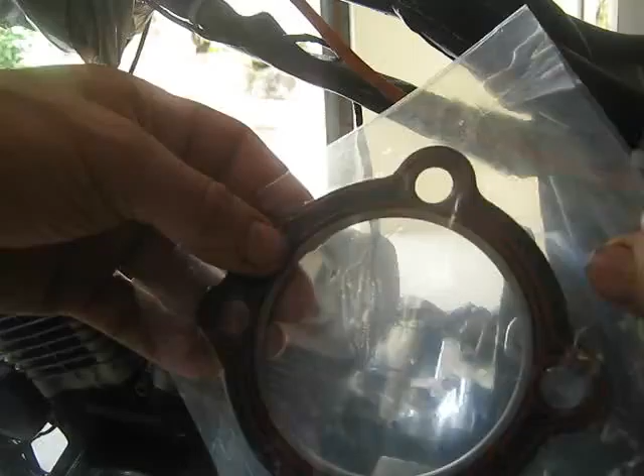Okay, this is the gasket set I'm using. Street Sport Industries.

I think it said silicon, and it was very economical. I could have spent a couple hundred dollars, but it's $45.99 in the US. It costs $64.90 here, plus $18.49 for postage. So that's what I'm dealing with getting parts here. It's a good deal more expensive - the Australian dollar is close to 60 cents to the US dollar.

Try and get some more information.

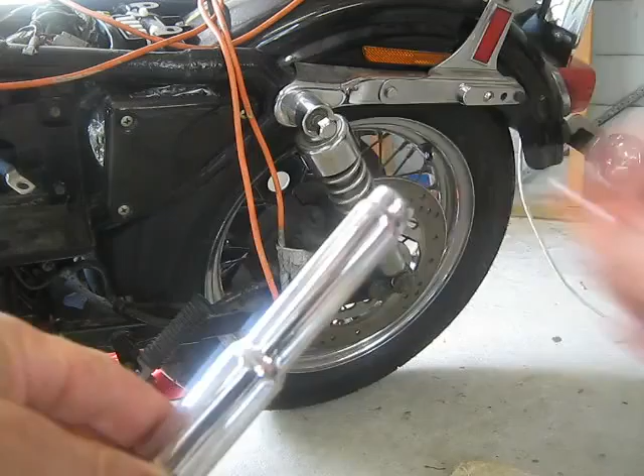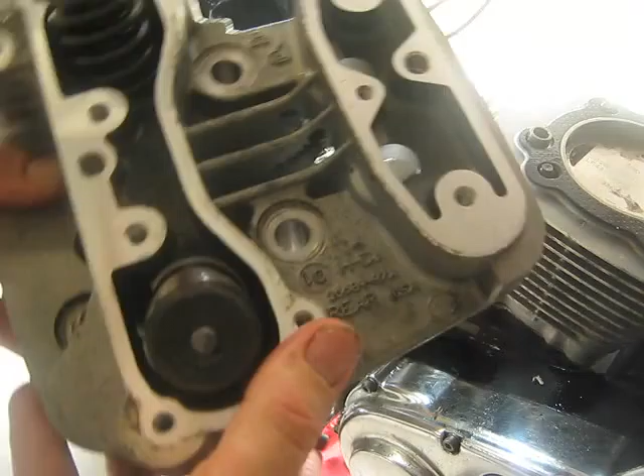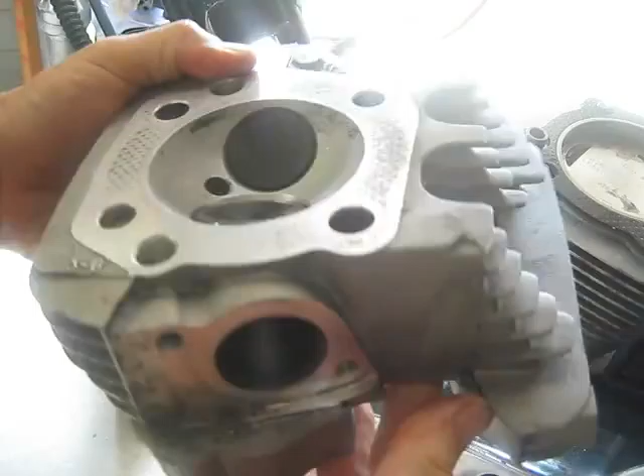Okay, rear cylinder head, 16684 87A. 16684 87A. That's the inlet, exhaust.

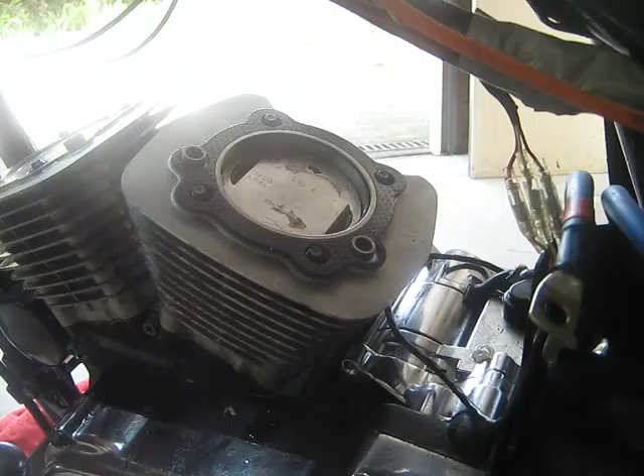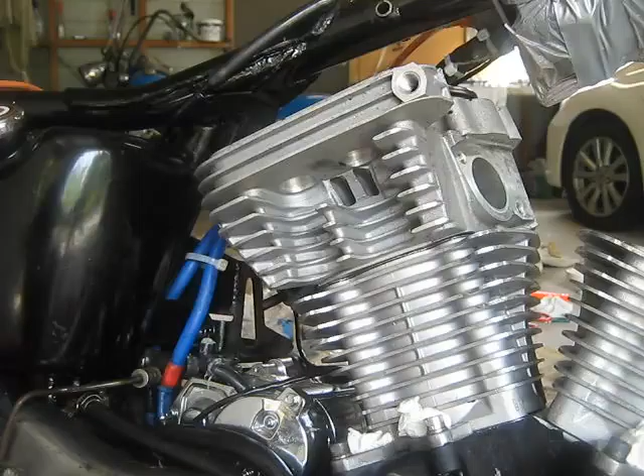These are all the same size, thank God.

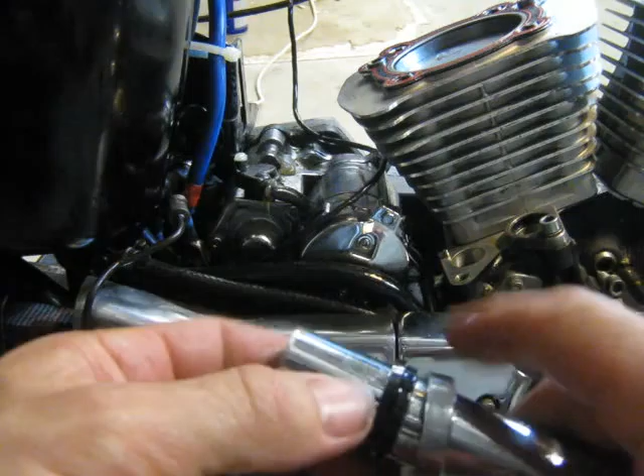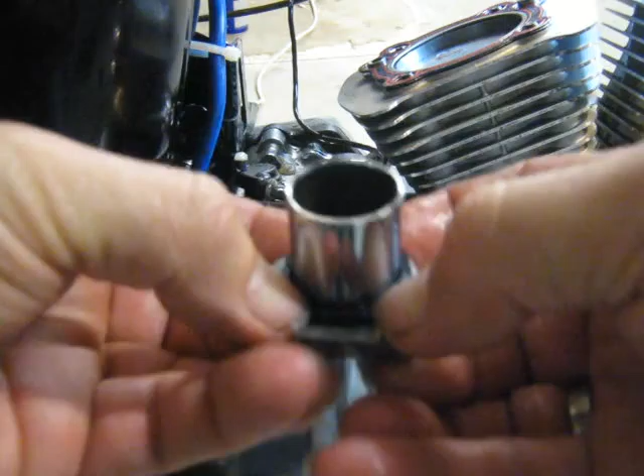So again, like earlier in this video, these supplied rubber gaskets for the pushrod cover won't fit. That's a new one there, and you can see there's no way I can get that to go in. That side's in, but then this side's out. When I push this side in, the other side pops out and it just jams. So that's a no-goer.

And as you can see here, when I put the original one on, it just sits straight in.

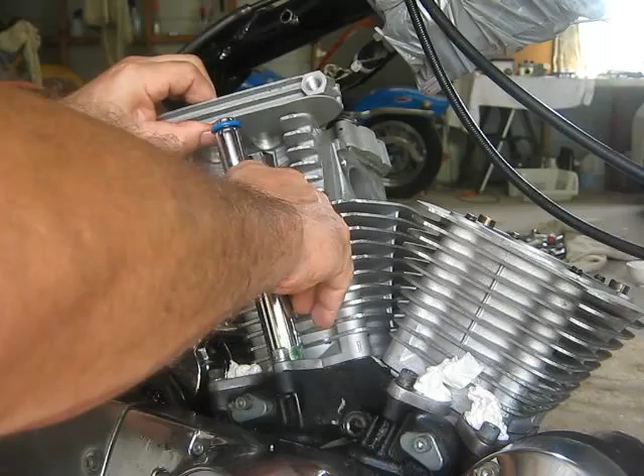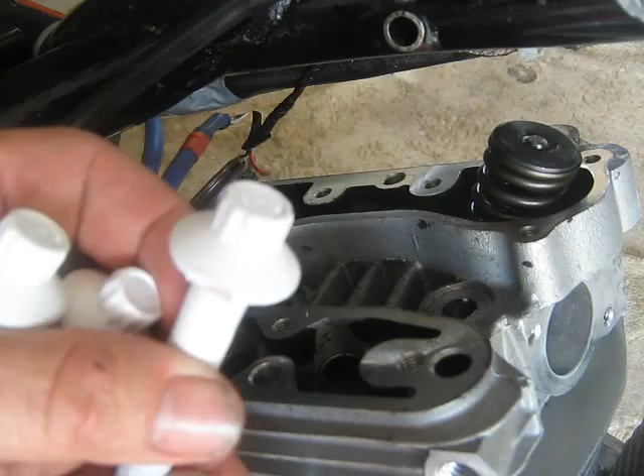These head bolts had a fair amount of rust on them, so this is rust paint. I've just got a brush and put a couple of coats on the top, and just one thin coat on the bolt itself.

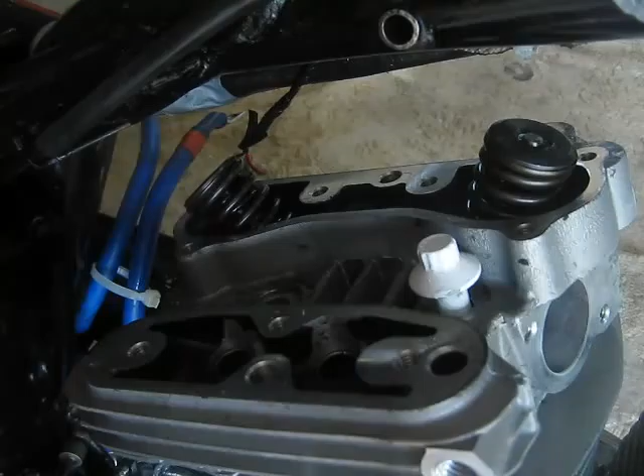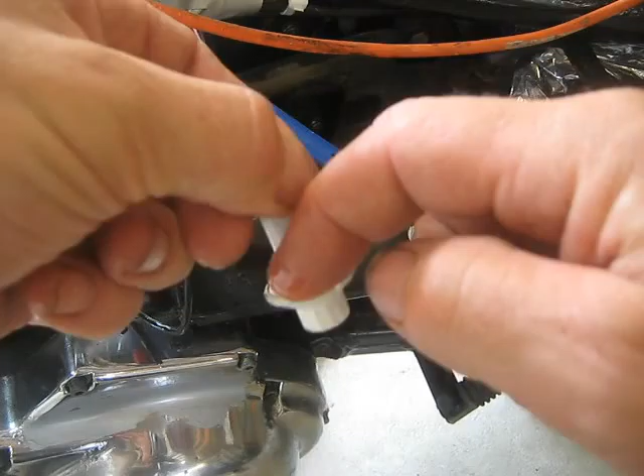Just spraying some cleaner lubricator into the threads, and I'll let that all drain out and dry a bit. There's no paint underneath the bolt, and I'm also putting a little bit of motor oil just underneath, to help with the torquing down process and make sure there's no rust. So I'll just turn them down hand tight for now.

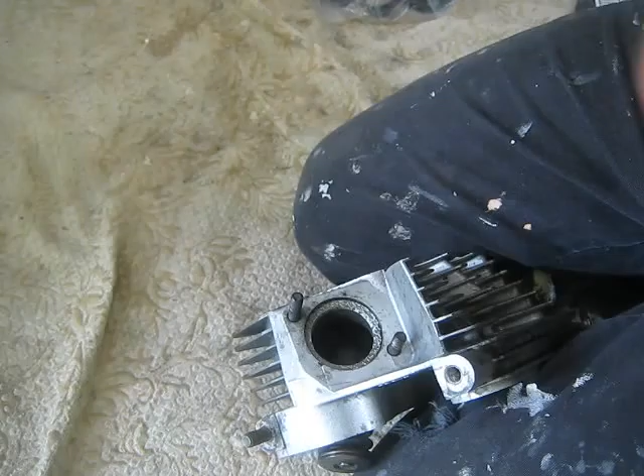Okay, front cylinder, 16682 87A. 16682 87A.

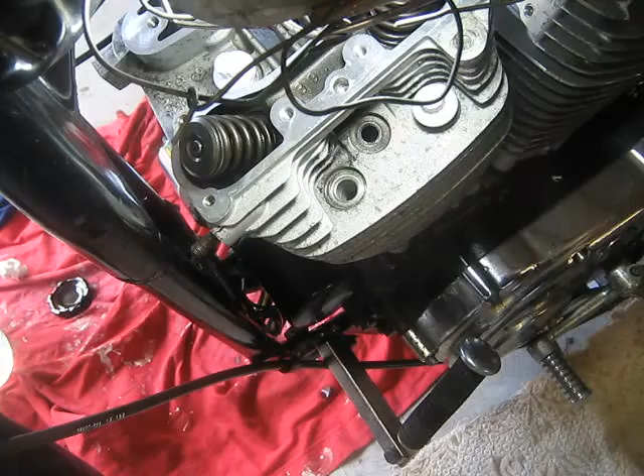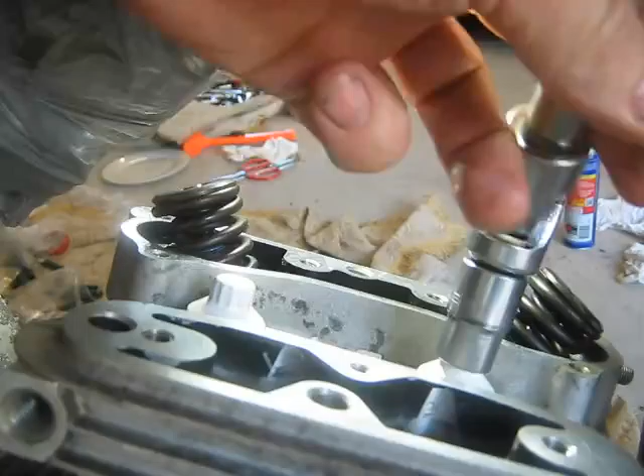Okay, so at this point the barrels and heads are on. I've checked the covers, pushrod covers, and they're all seated properly. I know all the gaskets and where they've got to go. I've practiced installing the tappet covers and the work I've got ahead of me. So that's it for today - it's nearly 4 o'clock, still got to pack up and do a couple other jobs. So next weekend I'll tighten them down.

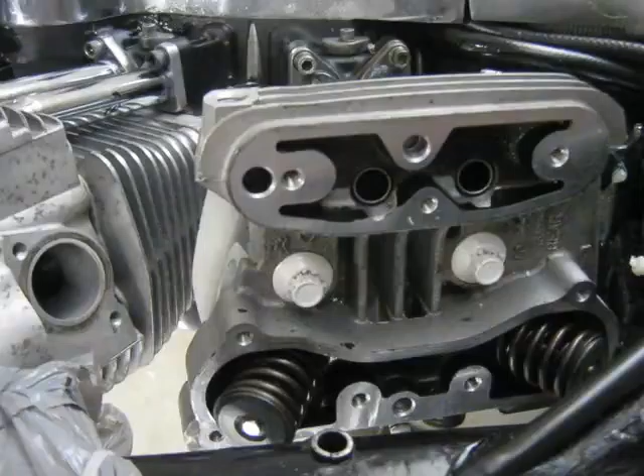Okay, tightening down the heads. Checking to see that we've got the heads round the right way. That's the front head, and there's the rear head.

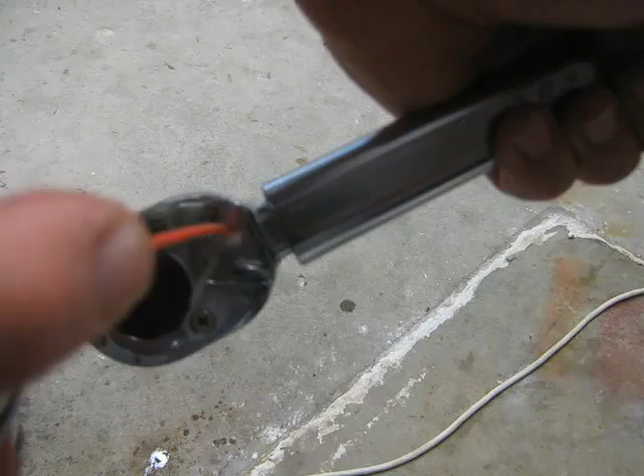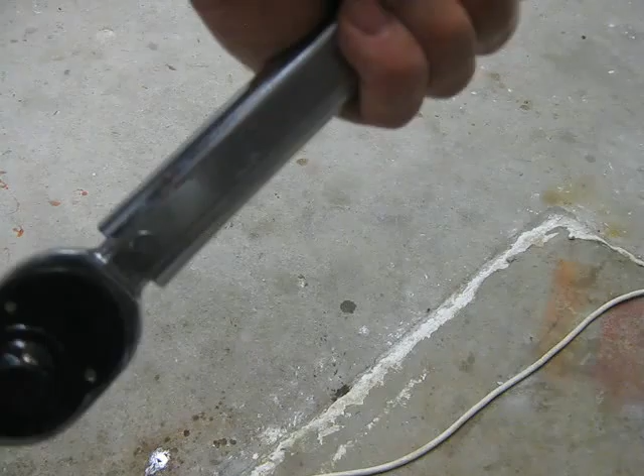Okay, it's a couple of months after the previous clip. This work only ever gets done in any spare time I can find, when there's nothing on the list and I'm doing up a house and everything. So on with the show.

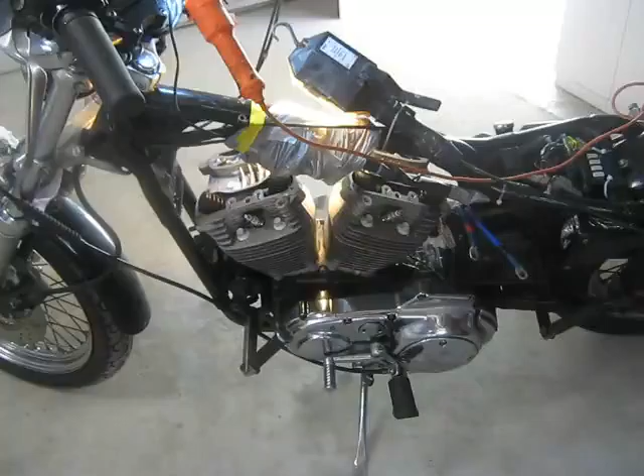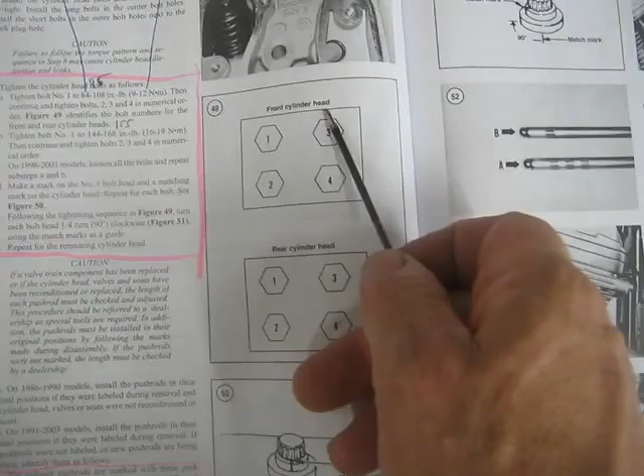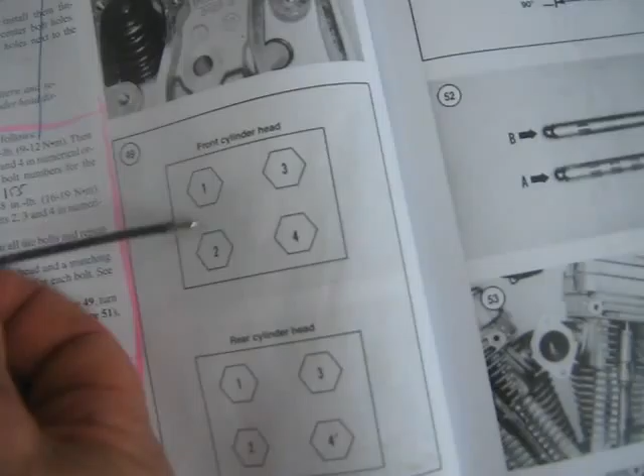Okay, the tightening sequence is 1, 2, 3, 4. So that says front cylinder head - it should say front of bike, same there. We were looking at it that way, and it's 1, 2, 3, 4, and front of bike.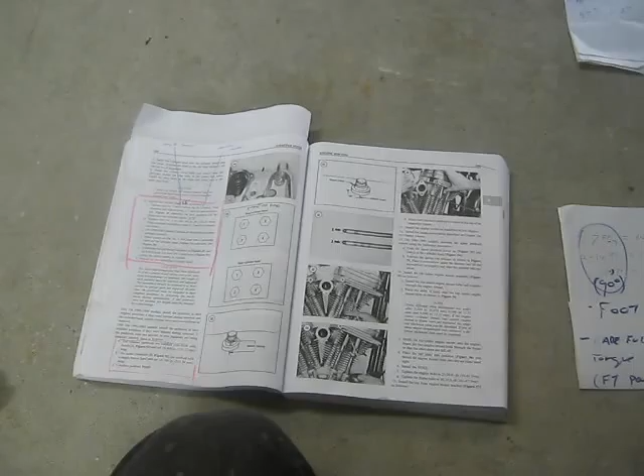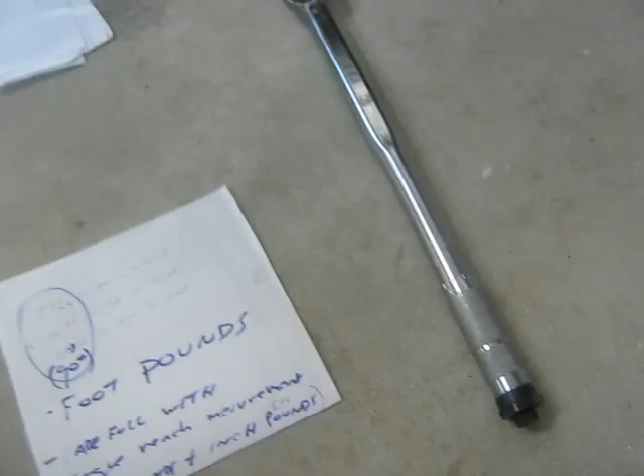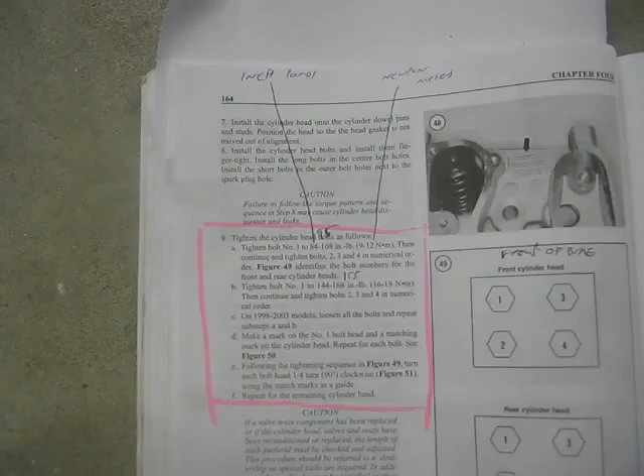Okay, this part of it's absolutely crucial, and I'm going to try and explain it the best I can. First of all, my torque wrench has got foot-pounds, so I have to make absolutely sure that I adjust this for foot-pounds and not any other measurement. Whatever you do, don't get foot-pounds mixed up for inch-pounds or anything else. The manual has inch-pounds and newton-meters, and then I'll give out the measurement for foot-pounds.

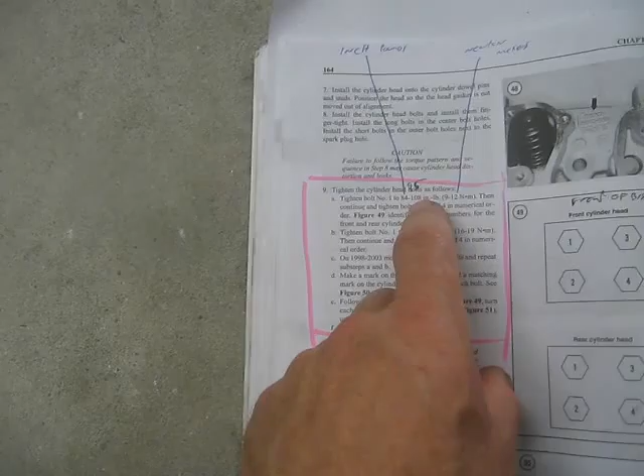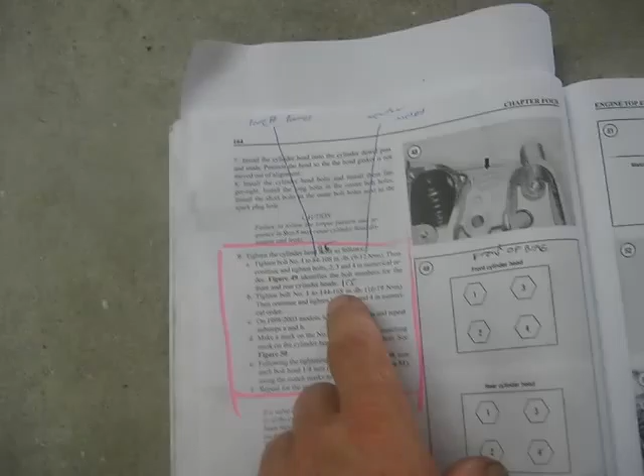Okay, the manual says, first of all, tighten the bolts to 84 to 108 inch-pounds, or 9 to 12 newton-meters. Then tighten the head bolts to 144 to 168 inch-pounds, or 16 to 19 newton-meters. And then it's a quarter of a turn, or 90 degrees.

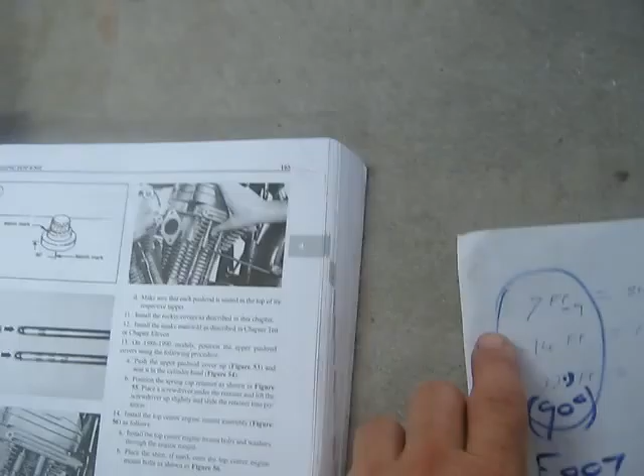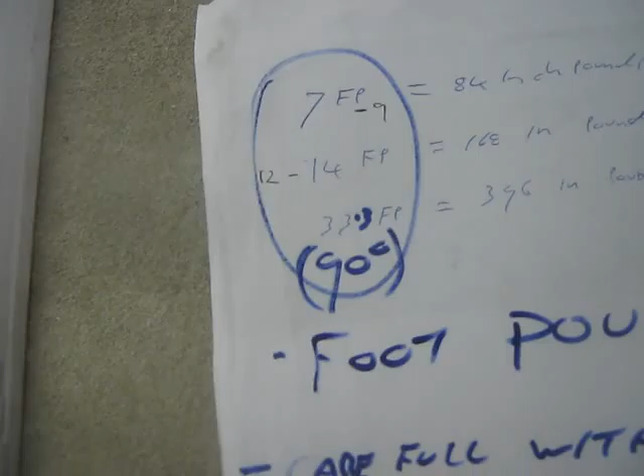This information is from a well-known bike mechanic on YouTube. We've got 7 to 9 foot-pounds first, and then tighten the head bolts to 12 to 14 foot-pounds, and then a quarter of a turn or 90 degrees, or 33.3 foot-pounds.

Okay, so get out your magnifying glass or your reading glasses, whatever you need, and make sure exactly what measurement you've got on your torque wrench. I see there I've got foot-pounds, so I'll go through this procedure using foot-pounds. The first one will be 7 to 9, so I'll go with 8 foot-pounds.

I don't know if I've mentioned before, but I've got a spray-on lubricant, and I've sprayed it around here in the lubricant hole and in the end here.

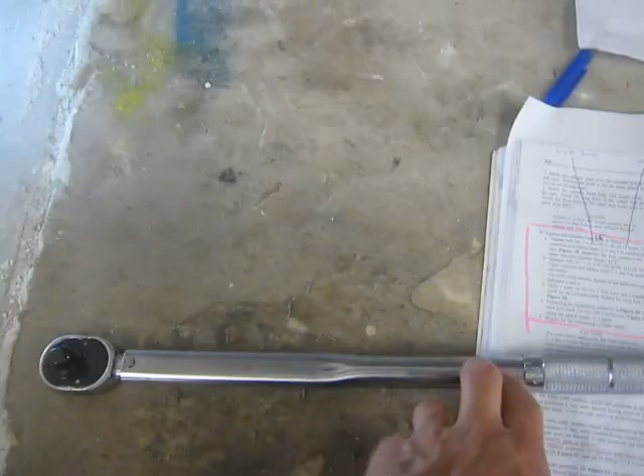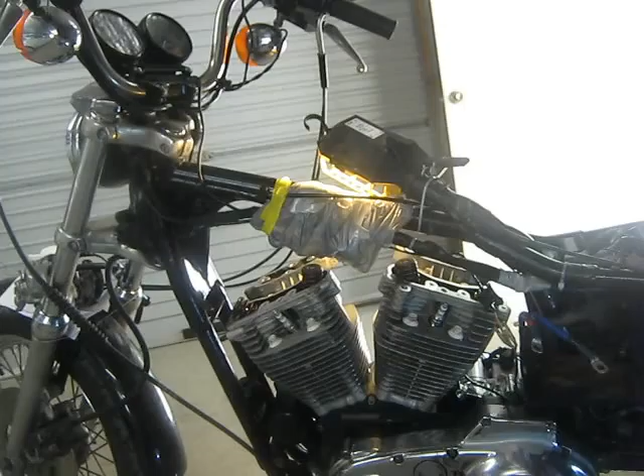If you tighten this up to the first sequence of 84 inch-pounds, thinking that it's foot-pounds, you're going to go up to your bike and you're going to smash, crack and completely destroy your bolts and threads. So make sure you're working with the right torque.

Okay, we've got a 13mm socket. I'll just get them hand tight. So consult your own manual, but I'm going with 8 foot-pounds. It's not much.

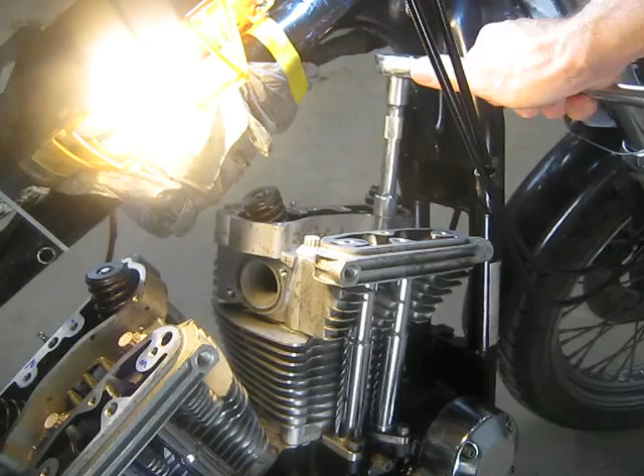Okay, 13 foot-pounds. I've only got one hand operating this torque wrench.

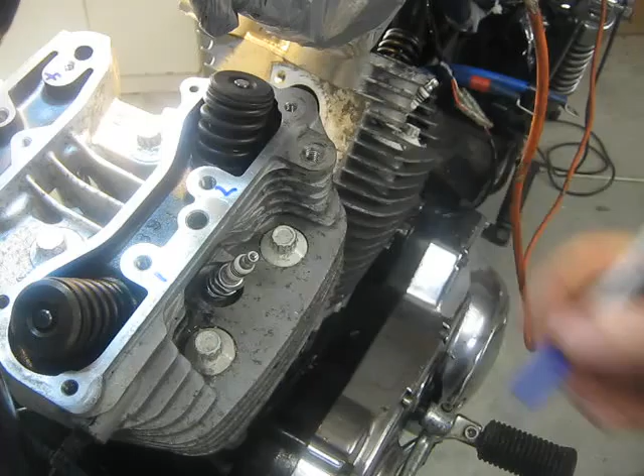Now it's a quarter of a turn, or 90 degrees. So I make a mark on my bolt and a mark on the head, and I turn it so that the two marks line up.

I've also got my torque wrench set at 33.3 foot-pounds.

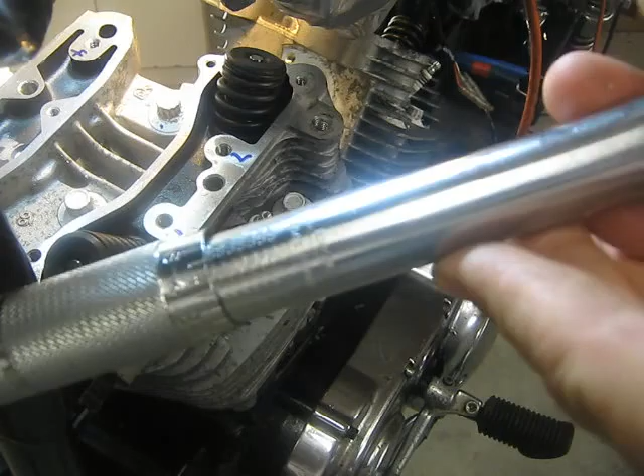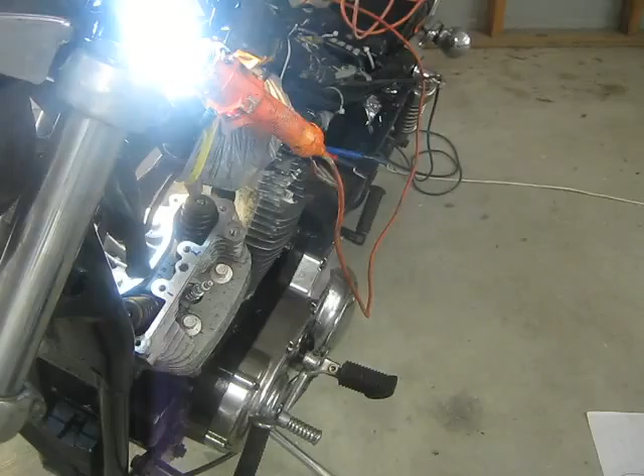Okay, that's a quarter of a turn and it didn't click. So who knows, I could have kept on turning the bolt around. Whatever comes first is the quarter turn or the torque wrench.

Okay, I've made a decision to line these marks up. We can see the two line-up marks there and there.

Obviously this head won't be at the same torque settings, or the bolts won't be the same torque settings. So we'll see where 33.3 foot-pounds takes us. I'll just move that out of the way.

That's in line and it hasn't clicked. Right, next.

Okay, rear cylinder head, 8 foot-pounds.